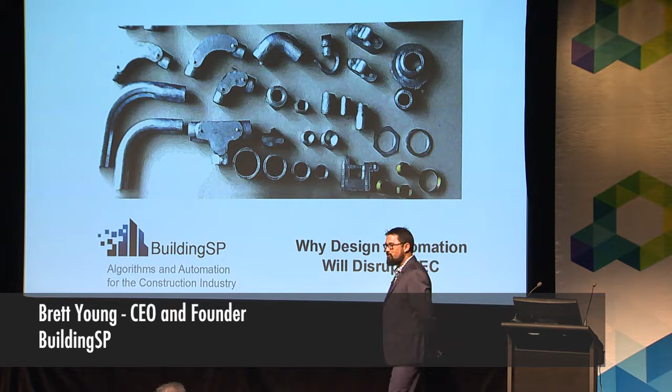My presentation is broken up into two parts. First, I'm going to describe the products we've built for you. Then we'll talk about what I think is the more important discussion: how design automation will be the fundamental thing that disrupts our industry. I think because we're a startup, we're in Silicon Valley talking to a lot of different people, and because of our background working with many people in the industry, we have a unique perspective, and I hope we can start a larger conversation about what design automation will mean for all of us.

So when you think about me and my firm, think of us as engineers. You are engineers as well, probably, and we all try to optimize a problem. The particular problem we're focused on is the fact that we want to make BIM more productive, because BIM is an important part of what we do, but it is too expensive and we need to make it cheaper. So all of our work is really focused on trying to optimize everything that goes into the BIM effort.

The fundamental problem we have is that we click too much. If you think about it, an owner pays you to do design, and that results in clicking, and fundamentally we do that too much. I challenge you: you can go download freeware and look at this with your teams and measure it. That's what we did.

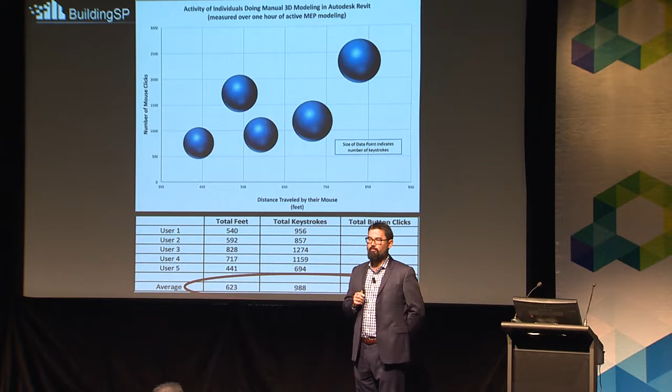Using freeware, we had identical modelers do identical tasks for 1 hour, and looked at the numbers of how much they're clicking when actively modeling. Electrical modeling, in this example, averaged 623 feet of mouse movement across screens and thousands of clicks of the keyboard and mouse. So fundamentally, we are not being productive using our current group of tools, and our effort has been to try and fix that problem.

The interesting thing is that it all began here. I was running a consulting company in California, and I found a beautiful PhD paper written by a guy who was doing his PhD on the F-35 fighter weapons bay. Across the weapons bay, you have electrical wiring harnesses and hydraulic lines, and they're routed by people clicking a mouse across the weapons bay.

When you're designing a fighter, things are moving around a lot, and you have to go back through and redo it quite a bit. He wrote algorithms that let you auto-route it across the weapons bay. I talked to him and convinced him to come on board, and he became part of our team. We acquired his tech, and over the last couple of years we've spent integrating that work from the F-35 into Revit and creating auto-routing tools.

Fundamentally, what is innovation, and how do we view it? We think this is an important thing, and we hope you can imagine it in your organization so that you can go and use it as well.

Innovation begins with an insight—some type of connection you make between what you're doing, what you've experienced, what you've bought, or whatever. Through a project management exercise, you take that and turn it into value. The trick is that the more you do it, the better you get at it: your insights get better, your project management gets better, and your understanding of value also gets better.

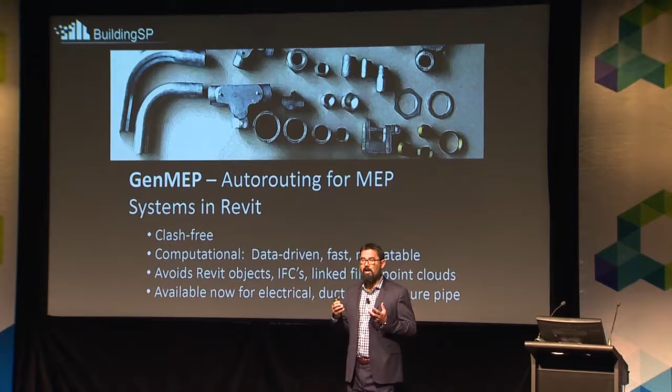So our first tool was the F-35 code that we adapted into Revit, and what we did was turn it into an auto router. If you had a start point and end point in Revit and parameters, it would auto-route clash-free through the Revit environment. It's integrated into the workflow, and here were our initial examples of how it worked.

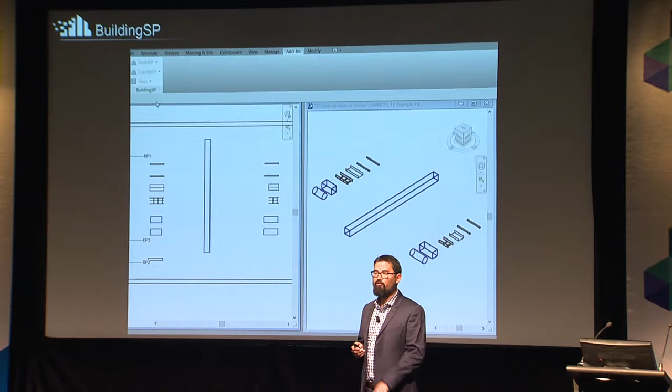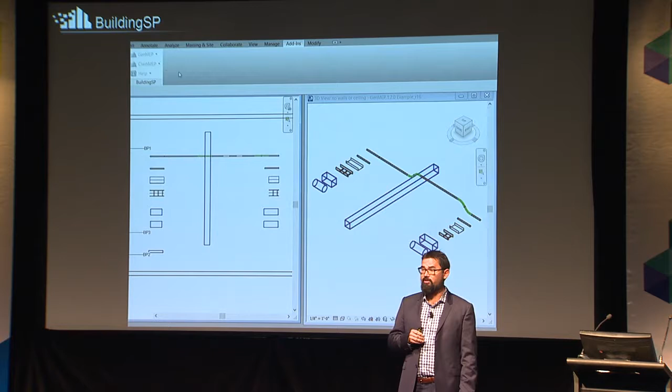Again, you have something in the way in Revit, a start point, end point, and parameters, and it'll auto-route. We consider this product to be a beta, and it continues to be a beta, because what we really need to do as a company is create a larger configurator so that we're no longer doing point-to-point routing, but trying to configure the entire floor for a given type of system.

But you can see here that we've taken a click-intensive activity and turned it into a function, basically, that will connect two points in a clash-free ad hoc environment.

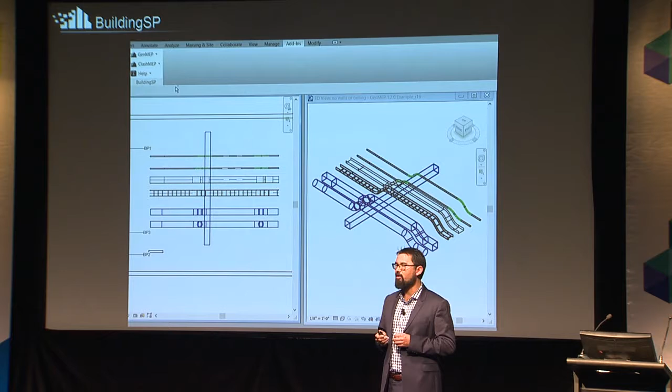We have an example here where you take a larger building and drive the tool in a data-driven way. Rather than do any clicking at all, we provide it with a data file, and it goes through and does the auto-routing sequentially. In this example, we're doing auto-routing of electrical conduit, followed by pressure piping and then cable tray.

We measure the effectiveness, or the speed, in miles per hour. Our current benchmark varies by the type of hardware you're using, but the typical miles per hour is about 43 miles per hour for how fast it routes. And that's on a MacBook Pro, our typical computer.

As you can see, it's going through, and we have start points and end points that are predefined. That's how we control it, by setting those start points and end points. Again, the greater goal of our company is to create a configurator that'll let you do the entire system at one point, at one time.

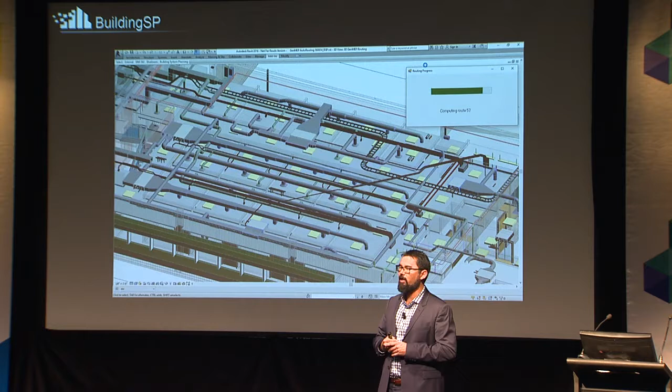All of that work is actually open to the Dynamo API and other C# APIs. So perhaps someone like the PowerCAD guys, or people who already have single-line diagram tools, can drive our tool using their tools. That's kind of where we're going.

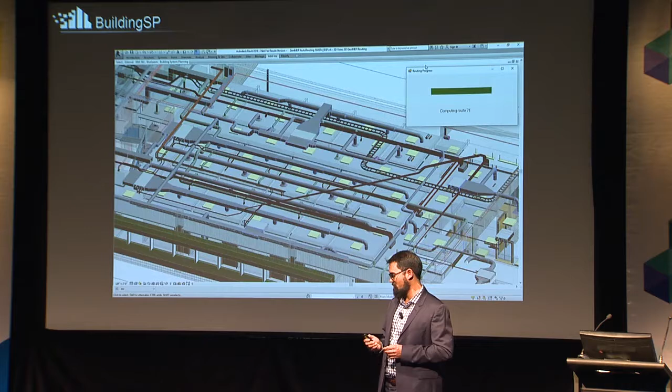While we were going through that kind of auto-routing effort, we realized one day that we had this secret sauce in a way, and that was our ability to manage memory within the building space. A building is a lot more memory intensive than an F-35 or any type of smaller item. And what we realized we could do is dynamic clash detection.

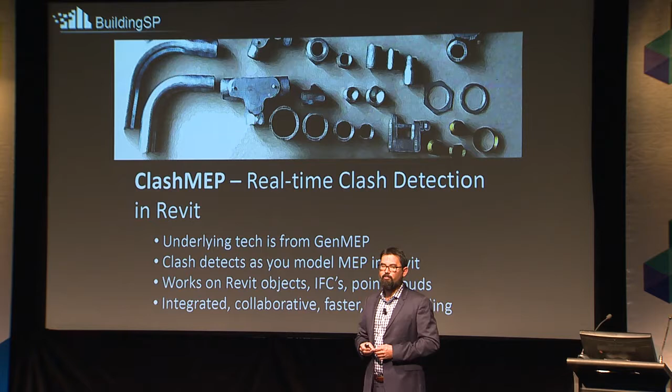So what we have is ClashMEP, by far our most popular tool. It's being used all over the world. We're closing about 2 enterprise licenses per week now. What it does is give you interactive clash detection directly within Revit. You do not need Navisworks, and you don't need to upload to Glue or to BIM 360. It is directly within Revit.

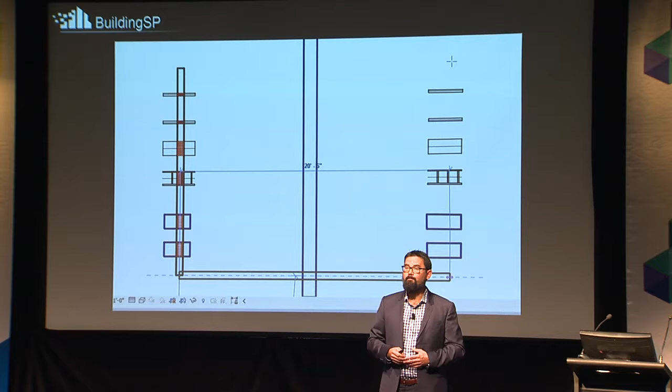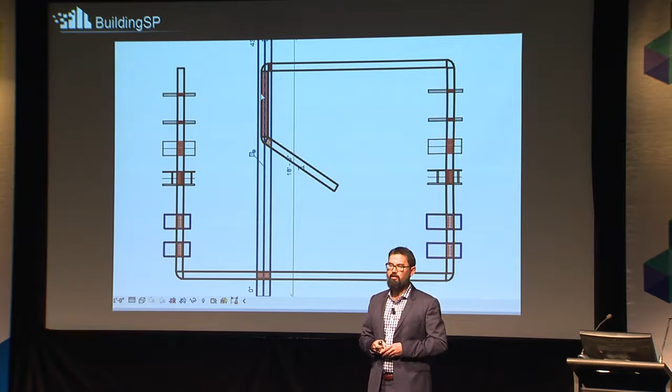Here are our early examples, which are a great way of showing off what it can do. It is spell check for Revit, right? You route, and you immediately see your errors graphically, with a hatch over the element that defines the intersection between the clashing elements. So unlike other tools, you don't get 2 clashes from either side of the duct — you get 1 clash for the volume you're intersecting. Again, it is fast and interactive.

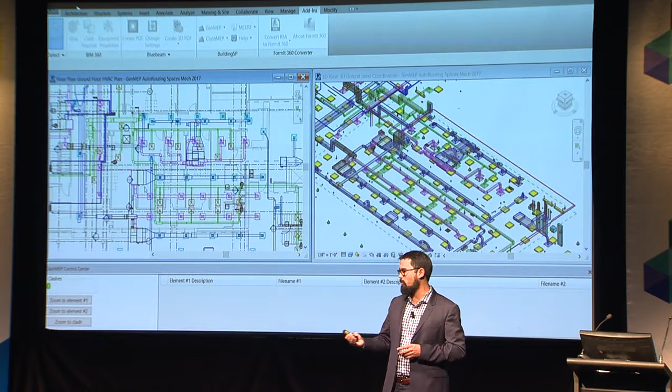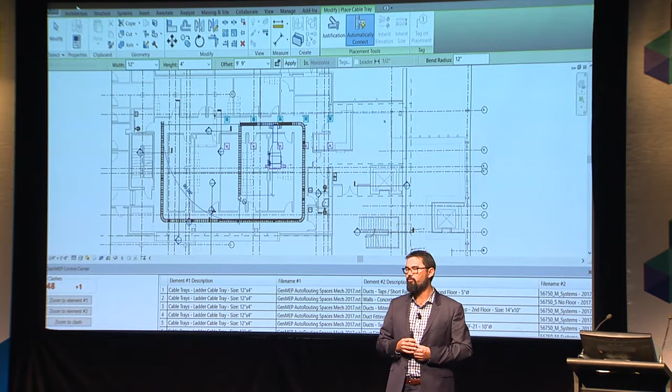If you take a look at a larger project and see how you'd actually use it, rather than that test fixture we had, here is a medical office building with linked files. The linked files are turned on, and you go through, and in moments you can have live and interactive clash detection. You can see we're aggregating clashes visually as hatches up on the top of the screen — in this case the cable tray. And down below, it's aggregating them in a report also in real time.

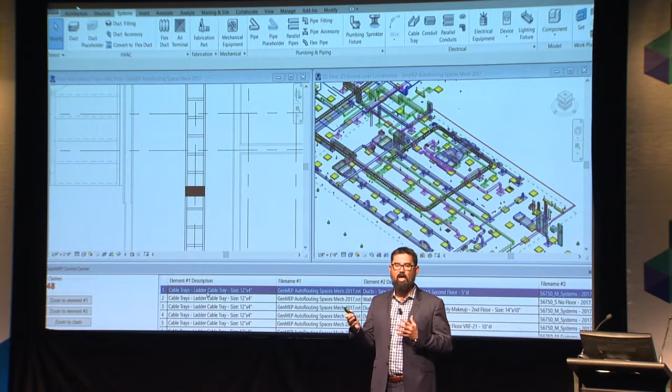Using the tool, you can then zoom to clash and go identify clashes. The goal really is to prevent clashes from getting to a meeting. We don't want to talk about clashes in a meeting — we want to deal with them live, where they are.

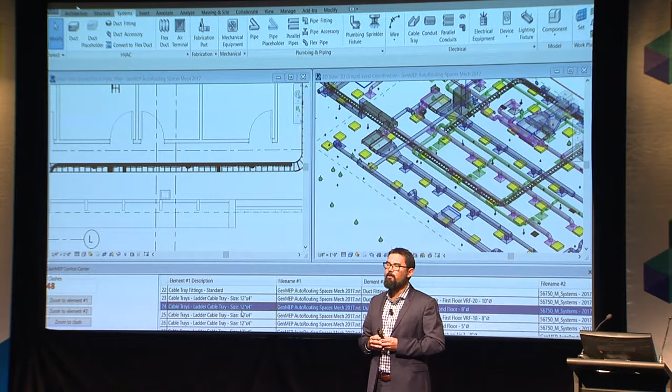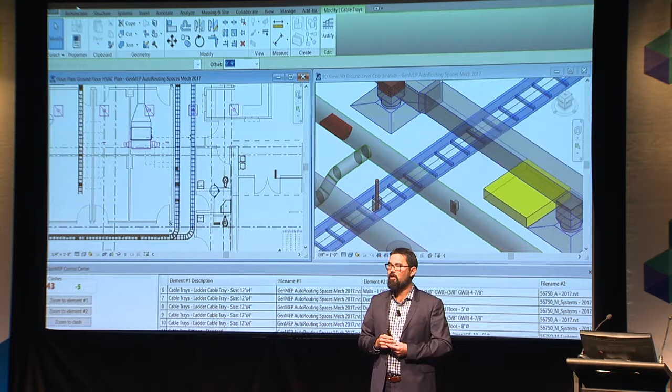From our perspective, our tool magnifies the capabilities of other tools. So if you're in Collaboration for Revit, you use our tool and add clash detection directly into your workflow. We integrated with a company called BIM-Track that does issue management — with 1 click, you can create an issue and talk about it in that meeting, or have someone else do it. In a collaboration setting, it's also powerful if you integrate it into Slack or Jira. We really think it's a breakthrough product because real-time interactive clash detection is a better, more engineered way of working than exporting out and going through another effort.

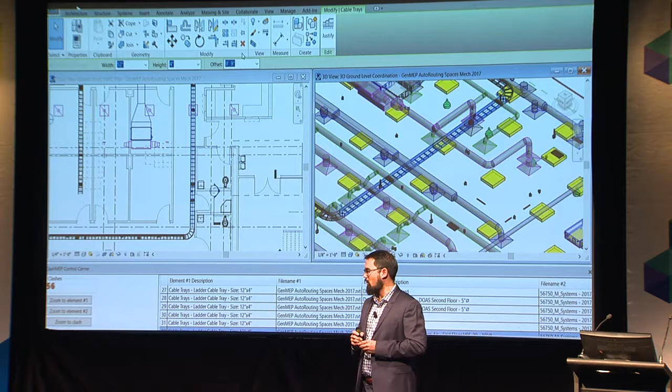Before I finish up on ClashMEP, there's another part we're working on. Because we're integrated into the Revit environment and not hidden behind a file, when a user creates a clash, we know the date, time, and second they created it, and their username. So all of a sudden we have gamification of coordination, and we can apply agile methods for managing coordination, and do all kinds of measurements. Not only do you know when people made a clash, you also know when they resolved it. So it really opens up a lot of capabilities in what we do.

While we were doing that tool, we also came up with a concept that we pitched to a nonprofit, the AMCA equivalent down in the US called the MCAA. What we made for them was a tool that measures congestion within building plenums. We pitched it and they said, we want to give it away for free. So they funded it through their nonprofit foundation called MCERF. We're currently in beta, and it'll be available as a free plugin for all of you to use however you like.

So what it does is programmatically find the top of ceiling, and we break the entire project into grids. For each grid element, we go to the top of ceiling and measure the volume up to the bottom of deck, or whatever your structure is. Then we query and find the volume of all the MEP or other things within that column, and do the ratio of the two to come up with an index or score, a percentage filled of that plenum.

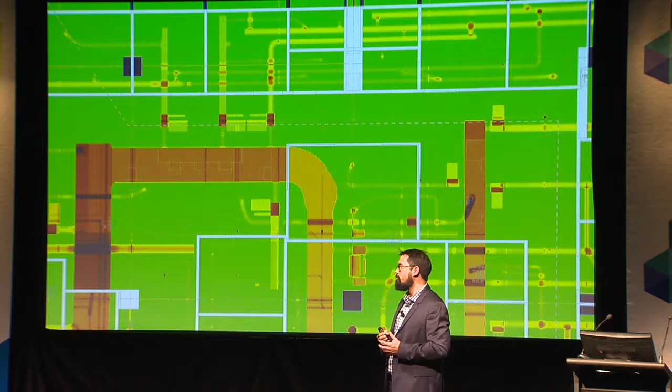Once we do that, we provide that information programmatically through a report or export, and we also create a heat map. So I'll show you the heat map. If you look at this, green is completely unfilled, yellow is 50% filled, red is 90% filled, and blue is 100% filled or more.

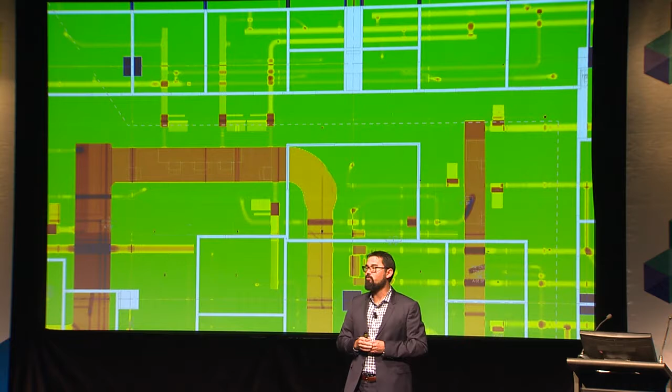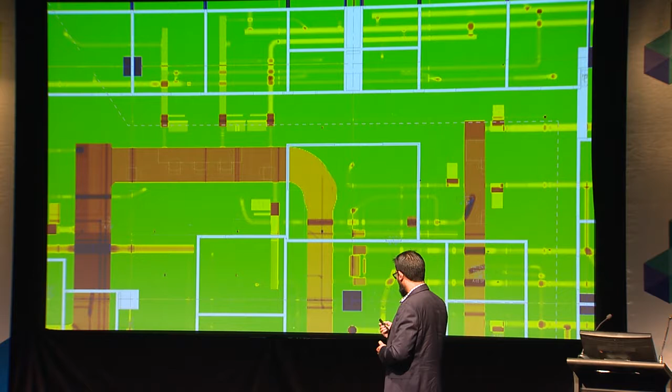So for the first time, just by looking at this, you can look at it and go, gosh, here I'm going to have problems. Anywhere there's blue, let's see if I can use this laser pointer. Where I have blue, I don't have any plenum space left. I'm filled up, I'm 100% filled. Things have to fundamentally change.

Where you're tending towards red and orange, you're also probably likely going to have a problem. In this image, for example, we're at 50% DD. So if you're at 50% DD and starting to fill up your plenum, you don't have cable tray, conduit, braces, hangers, or whatever the owner is going to add later. So fundamentally, we can really change the game and put numbers to and visually describe that problem we've all had of 10 pounds of groceries in a 5-pound bag. This is the actual visual look at that.

Not only that, people like Adam and Cesar can go and programmatically talk to this data and come up with benchmarking and estimating to create predictive analytics for when you're going to have a problem. If you're at 50% SD or DD and getting up to a certain index value at the core of your building, you're likely to have a problem, especially on a healthcare project or a particular type of project.

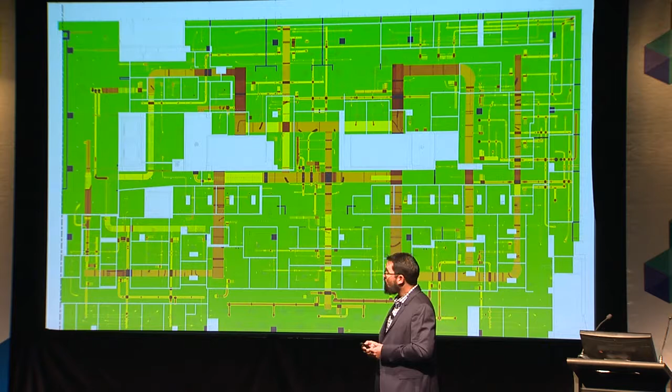We're also beginning to come up with insights when you take a look at it all. When you look at the overall building, there's actually a lot of green here. Buildings are complex, but they're not really that complex. We can really drill down to what the real problem is, and the real problem is the core of your building and the corridors. So we're trying to change the narrative to say, focus on the core of your building. If you can get that right, everything else will fall in place. That's the story of how we're trying to go and do that, and create tools that help you do it.

Another thing that we have, partially because of the crazy people we hang out with in our preschool groups, we're doing machine learning for clash prioritization. That's because there are a couple of people who do it for LinkedIn and Microsoft around where we live. They pointed out that you can go get free Python code to do machine learning, and we thought that sounds great.

I've got an application. When you take a look at clashes, what we really want to do is rank all of our clashes so we're only focusing on the top important ones, not the unimportant ones. The important clashes are ones that cost money, need a meeting, have multiple trades, or are near areas of congestion. If they're near an area of congestion, I'm not likely able to fix it. So this is our effort to use clash prioritization.

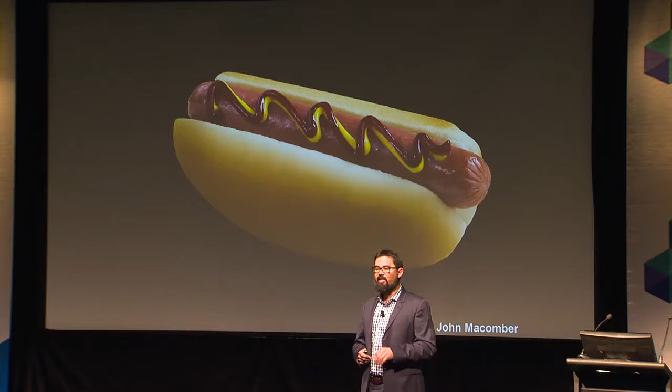And I like to typify it with what I call the innovator's dilemma, or the hot dog problem. Imagine a construction company finds a caffeinated hot dog. Magically, the caffeinated hot dog increases the productivity of their job sites so that the cost of construction goes down 10%. Magic hot dog, right? We've never had an innovation that has achieved that type of savings, right?

The innovator's dilemma within construction is what happens after you innovate and invest money into the caffeinated hot dog. We give it away. We guarantee the next job by giving the owner a discount on their project to guarantee the win. We take caffeinated hot dogs and we turn it into top-line growth, and then pretty much everyone else acquires caffeinated hot dogs, and we have provided the owner with a better product or a cheaper product. We have won jobs, but we're not able to retain the value of the innovation that we invested in.

So why would you invest in innovation as a construction company? Because, you know, marketing is a good reason, but compared to other industries, we have this problem of giving away the innovation because of the dynamics of our marketplace. And if you email me afterwards, I can forward you John Macomber's paper, and you can look at how he captioned it.

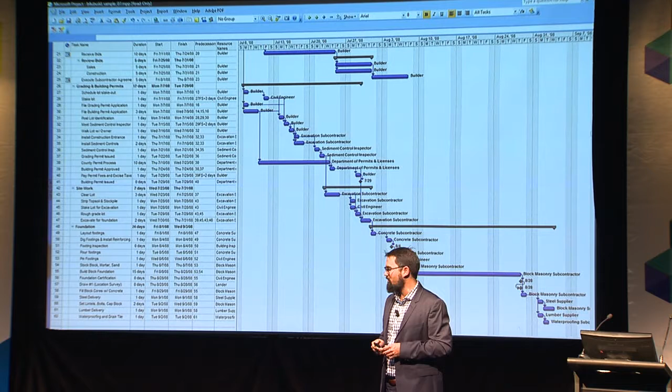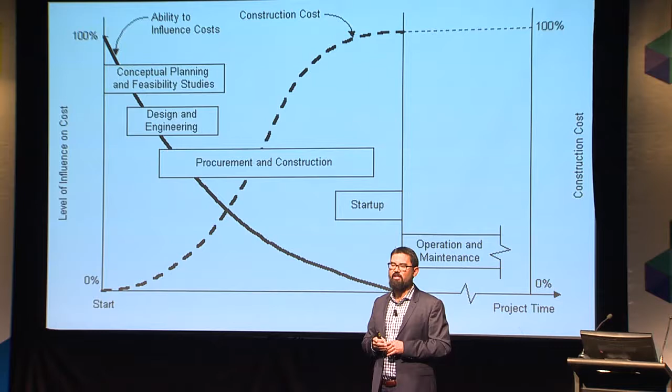Money. Everybody went through this and was shown this graph in college, right? That over the course of a project, you lose the ability to control cost. This actually has a name to the curve, I forget it, but basically, where does design automation happen? It happens in the earliest phase of the project, when you still have time to control the cost. So if you break it down to first principles, design automation has the potential to act on both time and money on everything it touches.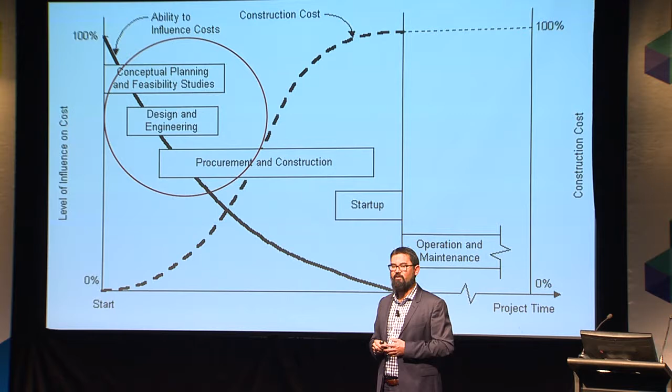The other thing you can talk about, and why we think design automation will have an impact, is that there are actual examples of design automation applied to other industries that have worked really, really well. Semiconductors is one. Animation is another.

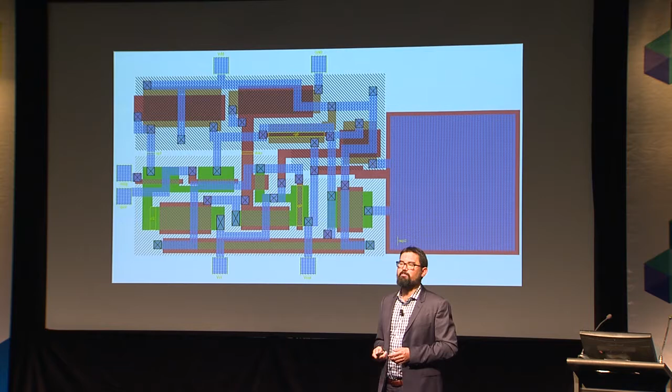This is a chip. It actually looks a lot like a building—like the things we go and build for MEP. In 1980, they made things very similar to how we make them. They made them using CAD, using standard libraries, and used automation from 1980 on to go and attack Moore's Law. They've continually added on to the amount of tech they have to chase Moore's Law, and design automation let them do that.

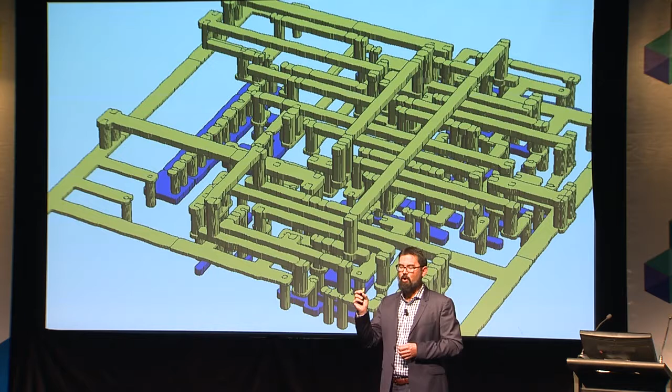Again, this looks a lot like a building, but it's a chip. What they've done is remove the substrate and only reveal the parts of the chip that actually have a purpose. In this example, you can see them modeling for design defects. All the little ridges are manufacturing defects, and they're dynamically testing it without actually testing it on the performance of the chip. So here's an example of an industry effectively using design automation to test their things before they actually go out.

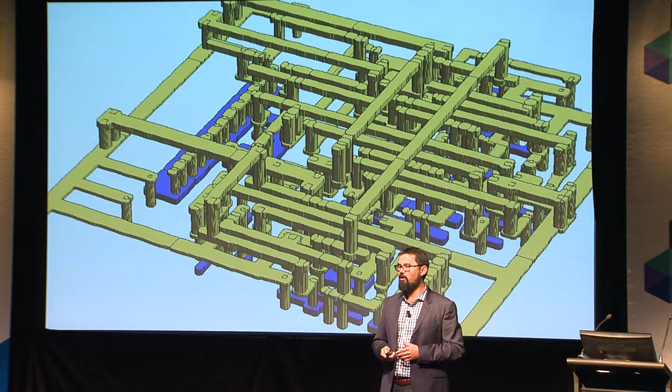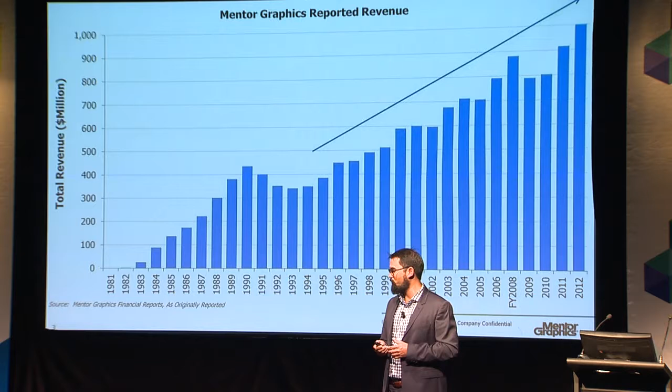Most important, there are actual companies that have gone off and focused on this and created a lot of value. Cadence is one, and Mentor is another. Go back to 1980 when EDA for microchips actually started—they have multi-billion-dollar companies, revenues of multi-billion dollars per year, and the company's very, very valuable because of all their IP. So our problem isn't much different from this problem. It has direct corollaries to how we should approach it.

You look at how they got better at using animation because they created digital tools that let them do design automation. The interesting thing is that you can only push the animation so far before the monster doesn't look like the monster it used to be. So you add design automation, and then you lower the number of people working on it, so you can now make a Pixar movie with about 40 people, where before you needed 200. Design automation has affected animation, and it has direct analogies to how we should be working.

We have a couple of examples of how we're pushing the curve and moving that forward. We're not going to be the only one who does it. We know the industry will probably be flooded by talent doing more and more design automation because we find it so compelling. It's important for you to realize this, to be ready for it, and to know that it will happen.

Here's an example. Let's see if I can get it to play.

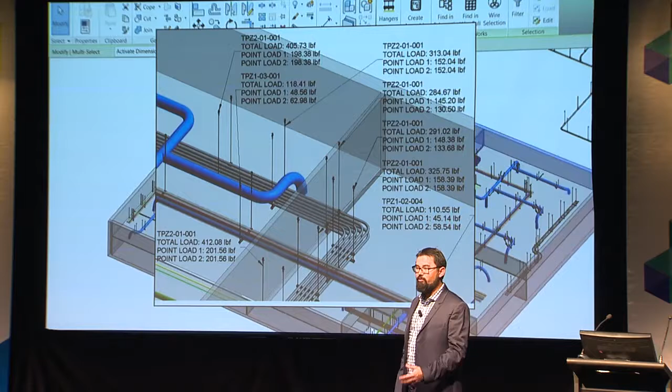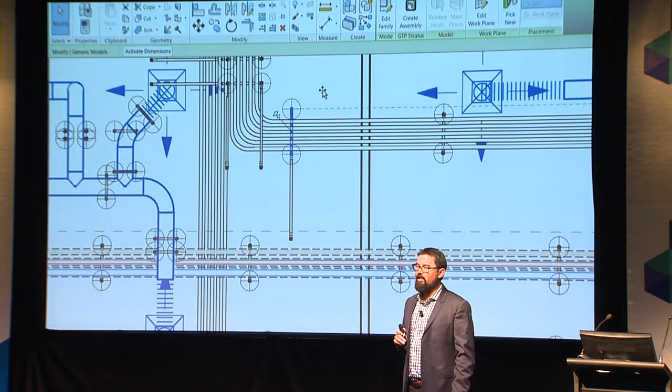HangerWorks by DeWalt is a design automation tool for the hangers and braces of a building, and it's a fantastic tool. It automates all the hangers and braces when you're in Revit doing MEP. With a click of a button per route, it'll optimize the hangers, place them according to rules, look at the load, size the anchor, and do the engineering calcs in the back end for all that equipment. It's a very sophisticated tool.

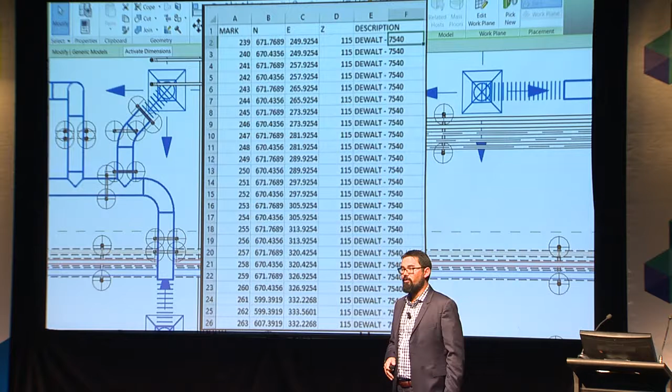It's $500 per year to use, so it's a fantastic price. DeWalt is actually a client of ours, and the original HangerWorks was created by a company called GTP out of Atlanta, and now we're adding technology on top of HangerWorks to make it better.

People used to lay out these hangers by hand, and now you have a piece of software that DeWalt wrote that is automated, so people really don't have to do that type of calculation any longer. In a couple of years, they might not know how to do it except in a procedural way. They'll know the concepts of why they do it, but won't know how to make a production out of it. So how we continuously improve upon all that is by stacking our innovation, so the innovation we create today gets added on and supplemented on top of each other.

Doing innovation a lot really helps you get better. So let's say you use HangerWorks for braces and hangers. Well, I've got a tool that does it clash-free. So we create an API and tie it into HangerWorks, and all of a sudden we have clash-free hangers and braces. Pretty phenomenal — you're stacking innovation on top of each other to make it all better.

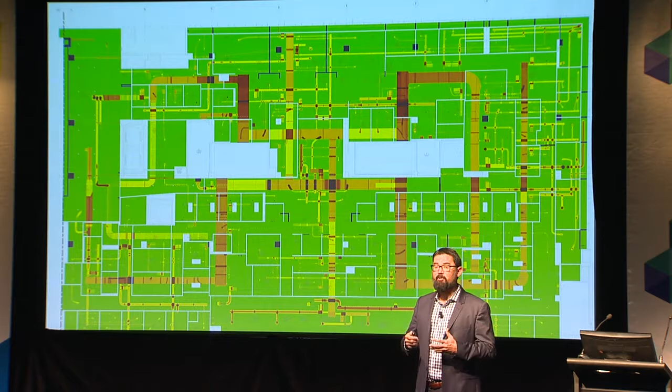Coming back to this problem, the fundamental problem of corridors. Corridors are important, so let's go write a tool that does corridors. Today we have a couple of tools we can use to create an algorithm for a corridor space claiming tool. We can detect the pinch point, do auto routing, do clashes, and because we can do clashes, we can move things around and see whether they're getting better or worse, coming up with methods to attack the core and a generative approach to how you go and do the core. So we're working on that.

And then finally, Summit told me I had to include this. I'm only including it because I'm halfway around the world, and it isn't likely to get back to people I know that we're working on this, because it's kind of crazy and kind of actually really insane. But the funny thing is...

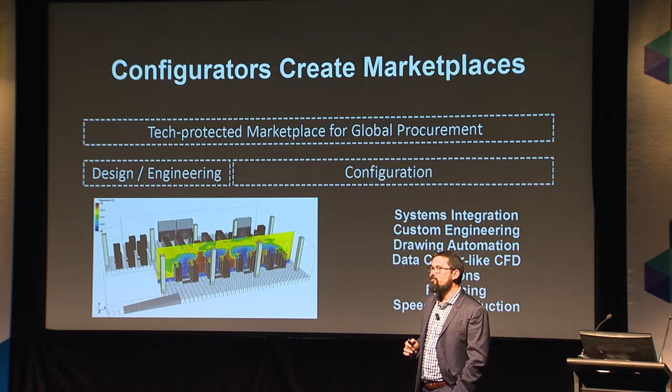So this is actually not for BuildingSP. It's kind of separate, and we're keeping it separate because it's a lucrative and emotional market that we're attacking, which is marijuana.

It happens to be a big growth industry in California, Colorado, and Washington. It actually has a lot of engineering in it, and there needs to be more engineering in it. We can really go and create a marketplace where if you want to either get into the market or scale a business, we can have a one-click procurement method for your indoor growing operation.

So we're actually trying to recruit Summit to come and become the CEO, and he and I are going to be Cheech and Chong of the... Again, I'm only going to do this because I'm on the other side of the world. My mom won't find out.

So kind of wrapping it all up — and this is probably the discussion over beers — we know we're going to be disrupted, we know we need to be disrupted. Design automation is much more compelling than a lot of the other tech that's out there. A lot of the other tech will actually be driven by design automation, because with design automation, the other tech becomes far more interesting. So we have a couple of views on how things will work. Very large firms are either going to lead the way or they're going to fail. They can lead the way because they have a lot of resources to attack the problem, and they get a lot of attention, but they're a big firm and they have trouble shifting. So who knows how that will really work out.

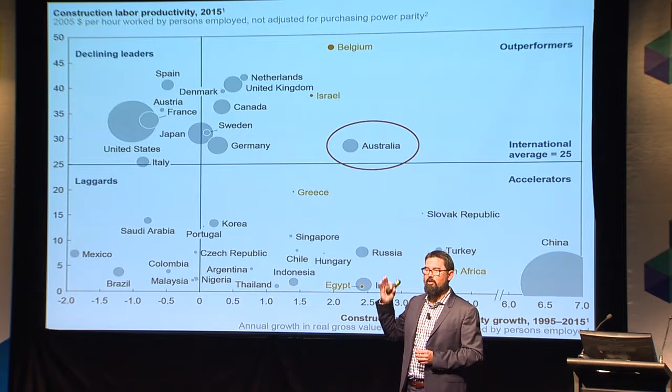One thing that has been brought up about the McKinsey report - where's Australia? This is a kind of complicated graph, on page 13 of the report, but it basically shows productivity measured on the vertical scale and growth of productivity on the X axis. Australia is the biggest country in the outperformer element here, and they're kind of often alone.

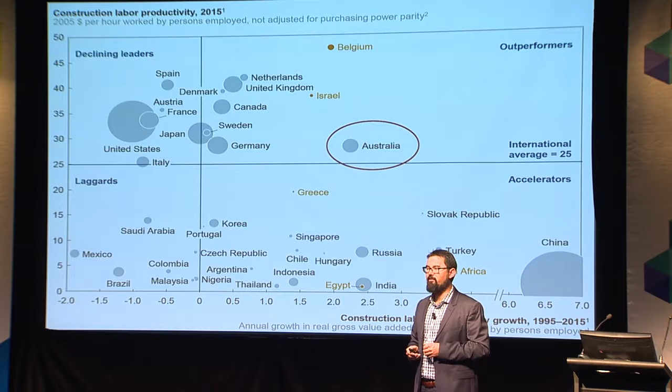I've been here a couple of times, I have friends who are Australian, and I've learned a lot from this trip. You have a very curious market, and I really believe that you guys as a group have the potential to lead the industry in how you innovate, because of your connections to Asia and the fact that you have large firms and how you treat each other and work with AMCA and others. We'd be happy to help you do that, because the U.S. is a kind of very complicated market, just very, very different from what you guys have here, which I think is very, very special.

And that is what our goal should be. We should look at these things we have around us and ask how can we promote that type of thinking in what we do, so that we can be better engineers and connect with our people better, rather than just say 'I want a BIM model on an iPhone.'